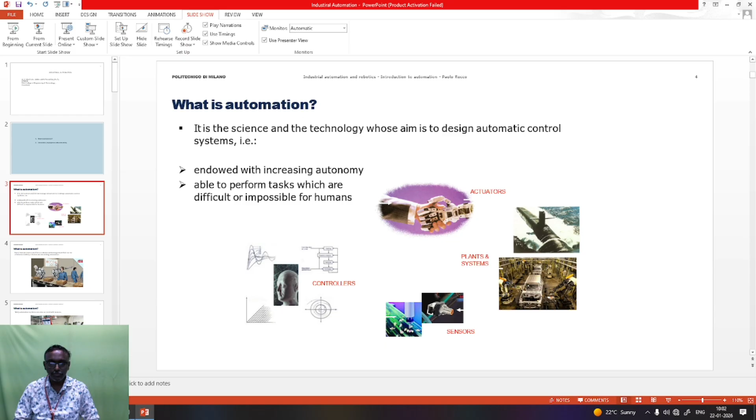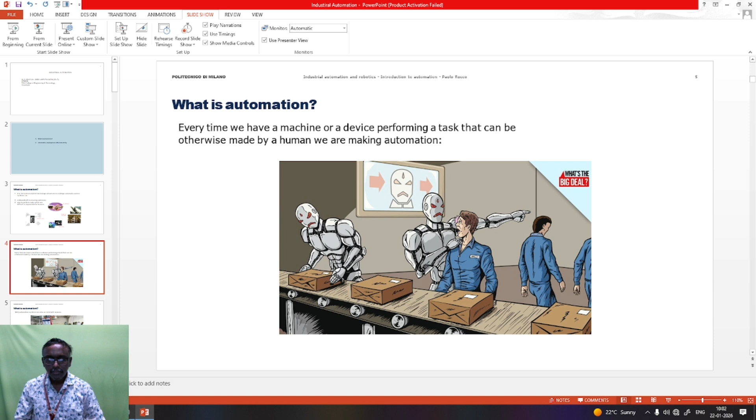What is automation? Every time we have a machine or device perform a task that could otherwise be done by a human, we call that automation. So in order for a machine to perform a task that a human would do, we automate it - that is called automation.

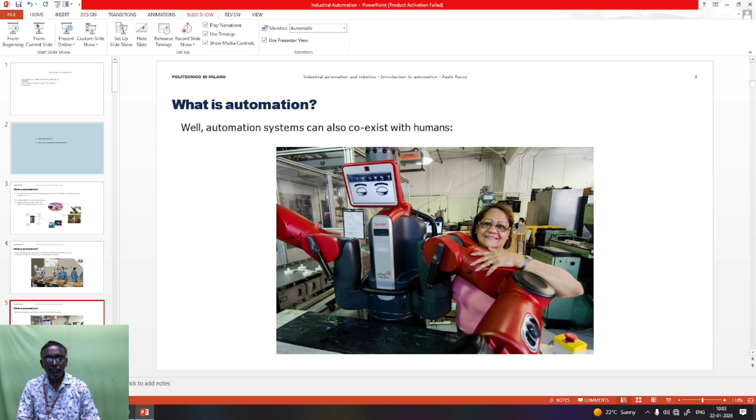Another point - an automation system can also coexist with humans. So human and machine can join together and perform a task, that is also called automation.

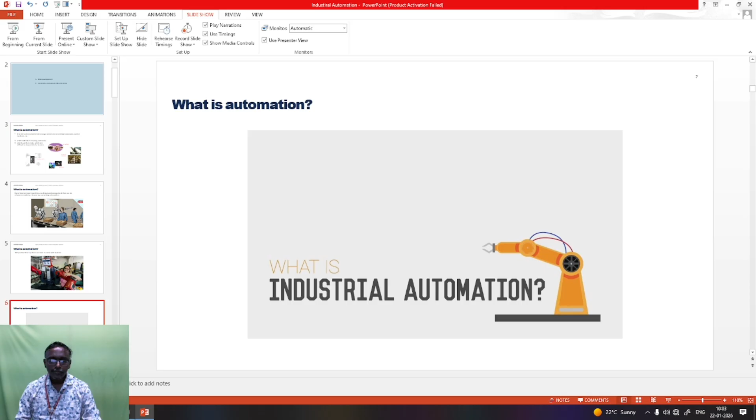So industrial automation - what is meant by industrial automation? In industrial automation, they are given a gripper that grips the tool, unloading and loading the products.

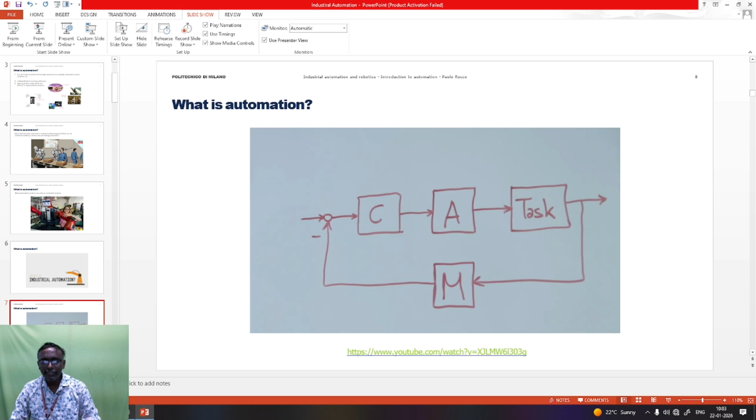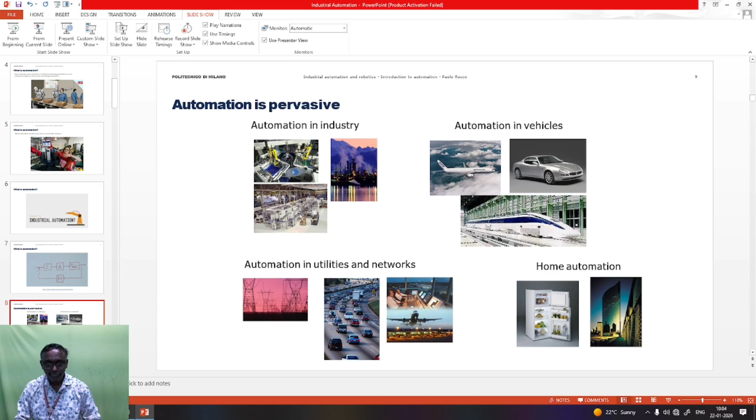Next is home automation - fridge and everything. Automation in utility and network - utilizing the network, so distribution lines and in airplanes. These are the networks. In an airplane we are connecting internet, meaning it utilizes a network - that is the automation thing.

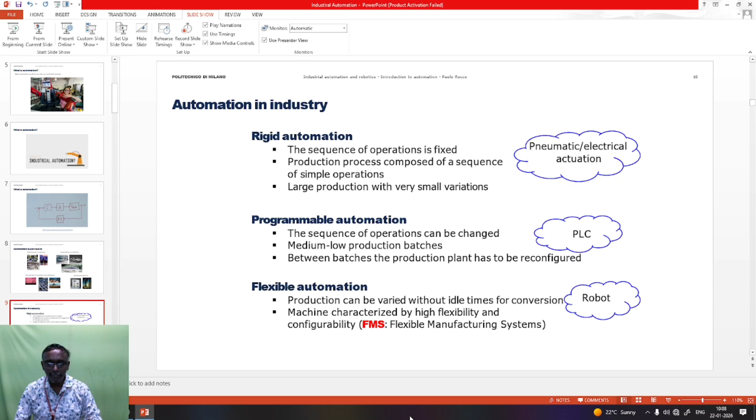So flexible manufacturing system means the robotic arm - for example, the robotic gripper can grip and unload the product from a ship, or load the product to the ship. These are some robotic components, robotic automations. Robotic automation is a vast topic.

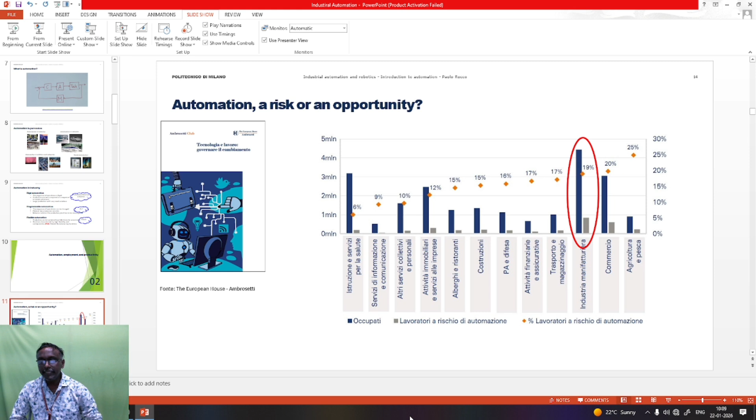So others like agriculture, construction, everything are having automation, but the big top is industrial manufacturing automation. So automation and productivity growth - the automation of activity can enable businesses to improve performance by reducing error, improving quality and speed. So when a machine has automation, it improves the quality and speed, in some cases beyond human capability.

Automation also contributed to productivity, as it has done historically. This would have given a needed boost to economic growth and prosperity, helping offset the impact of the declining share of working age population in many countries. So the productivity increase boosts the economy of every country.

So this is the relationship between automation and productivity growth. It is estimated - automation could raise the productivity growth globally by 0.8 to 1.4% annually.

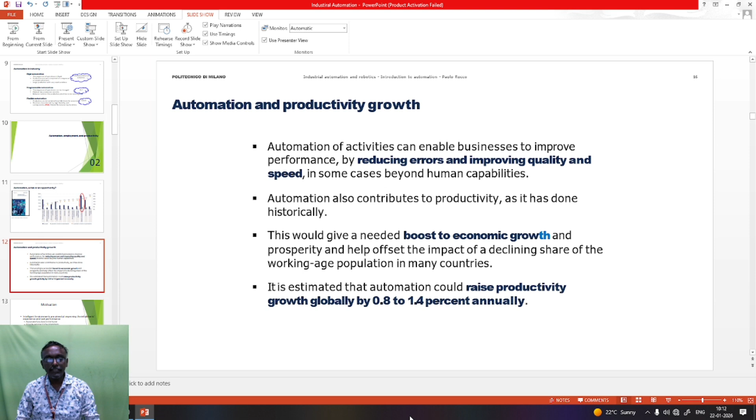So the environment affects things, meaning we have to control that. So performing intelligence automation, the system already gets help from the environment. So depending upon the environmental condition, we can make the decision.

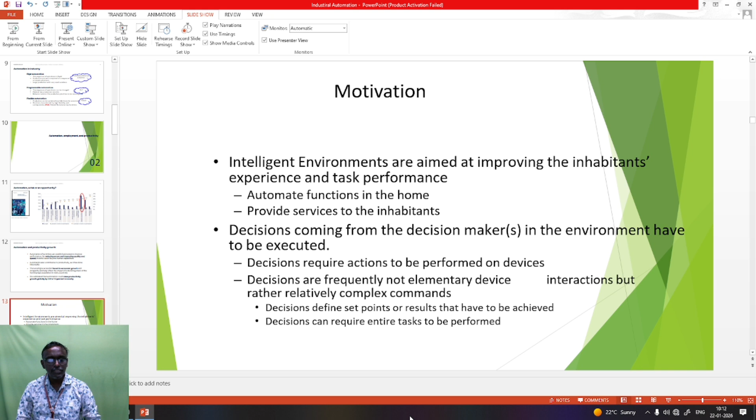Next one is motor drive robot. So how to drive a robot? Using a motor we can drive the robot, using a DC motor or AC motor.

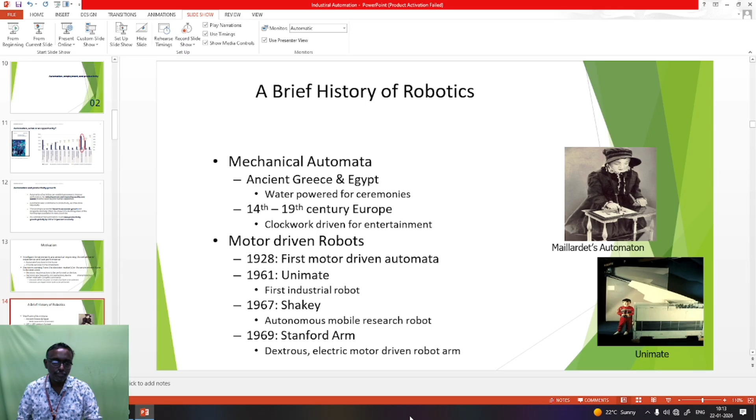Utilizing that, the automation also has mobile research robots - so first is the first industrial robot, an automation mobile robot. Next one is electrical motor, robotic arm. So in robotics there is a device with a degree of freedom that can be controlled - there are six degrees of freedom.

So first one is manual handling device - we can manually handle the device. Next one is fixed sequence robot, next is variable sequence robot. Fixed sequence robot means we can use it for a conditional one - we have to do the unloading and loading of a ship using a gripper robot, meaning that is fixed. So it is not a movable one.

So next one is variable sequence robot - meaning depending upon the environmental condition, it can change the robotic operation sequence. Next one is playback robot - meaning we already executed the program and stored it in memory, so it is repeated playback.

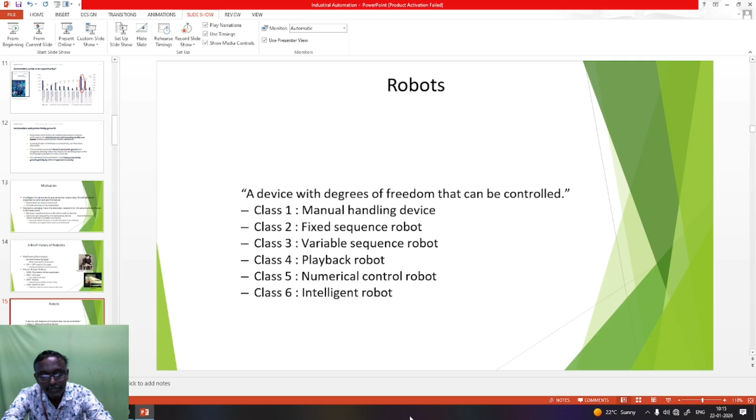So next one is numerical control robot - meaning nothing but numerical control, so numerically we can control it. Next one is intelligent robots. So first we are discussing about robots.

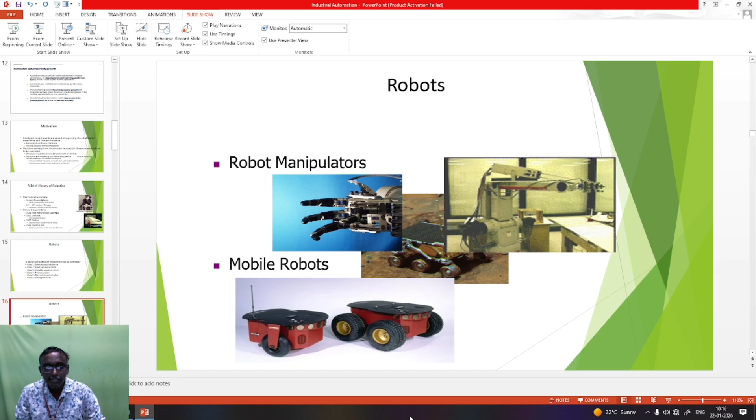So robots manipulator - this is a manipulator. It looks like the hands of a human, but is replaced with robotics. So next one is mobile robot - mobile robot means a platform, it is moving with the robotic.

Automation and robotics in intelligent environment - control of physical environment. Automated blinds. Next one is thermostat and heat - thermostat we already know. Depending upon the heat we can easily operate the machines, and depending on that it's called a thermostat. In the iron box itself they have a thermostat.

So in the fridge also they have a thermostat, depending upon the temperature. Next one is automatic doors - in automatic doors also we are employing robotic intelligence. Automatic room partition - automatic room partitions also have the robotic thing. So these are controlled by the physical environment, and depending upon it, we tune the robot.

So next one is personal service robot - home cleaning. Next one is assistance of elders and handicapped - assistance to elder and handicapped. So here floor cleaning also has a robot, and they are designing robots for home cleaning.

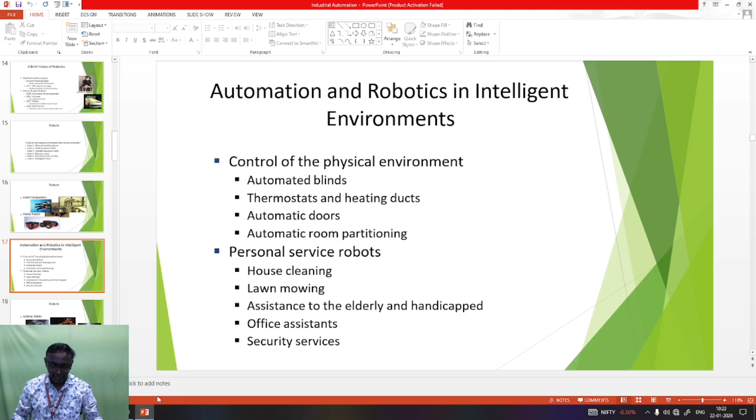Next one is security service - in security service we can replace humans with robotics. So these are some employments of automation and robotics in an intelligent environment.

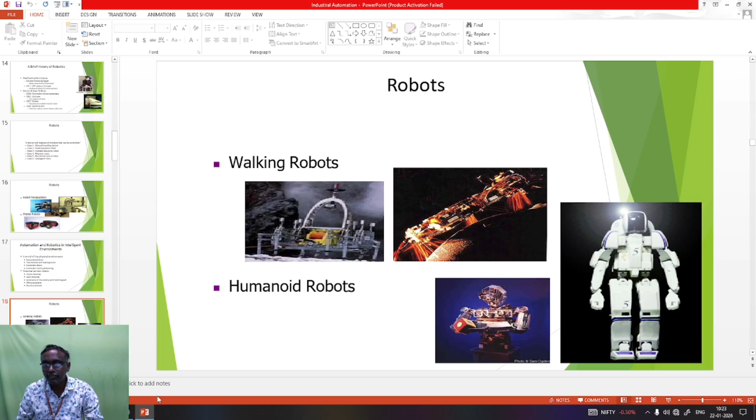It can walk on the moon and take videos, everything. So that is called. Next one is

Autonomous robots. The control of autonomous robots involves a number of subtasks: understanding and modeling of mechanism, and another one is kinematics, dynamics. So these are two properties.

Understanding and modeling. Next one is reliable control of actuator, that is closed loop. So closed loop means, as we already know, in control systems there is open loop and closed loop.

Next one is generation of task specific motion, path planning. So depending upon the task, the path is planned.

Next one is integration of sensors. So many sensors are employed in the industry, and they are added and accumulated in the microcontroller, and the output is an actuator.

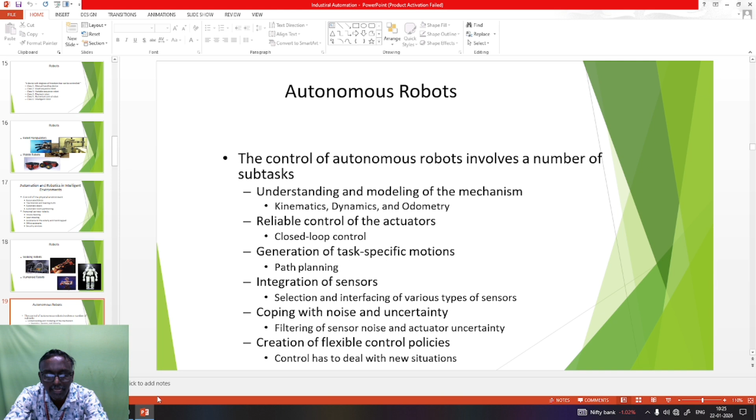Creation of flexible control policy. Control has to deal with new situations.

Requirement of robots in intelligent environment. Autonomously, robots must have the capability to achieve tasks and objectives without human input.

Without human input, the robot can operate, achieve the task and objectives.

Robots have to be able to make and execute their own decisions based on sensor information. So the robot can give decisions depending on the sensors, as the output of sensors or detectors is given to the robot.

Intuitive human robot interfaces. Using robots in smart homes cannot require extensive user training. Commands to robots should be natural for the inhabitants.

So this one is the human robotics interface. Human and robotics are interfaced; they are merged together and perform a task.

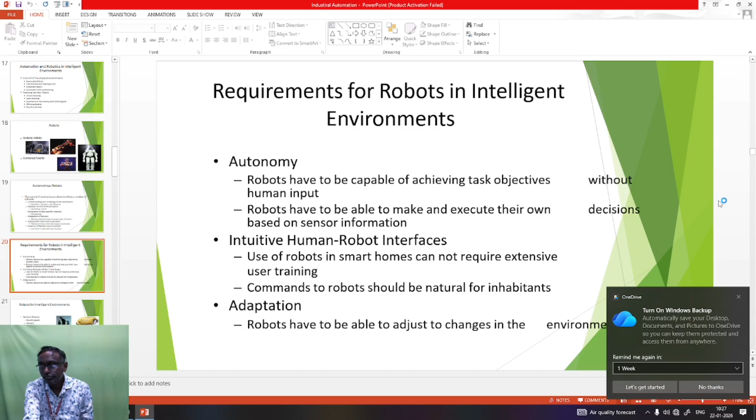Next one is robotics for intelligent environment. Service robot - so we are discussing service robots. It can act as a security guard.

Next one is delivery, another one is cleaning. So service robots include security guard, delivery, and cleaning. These are some applications of robots for intelligent environments. Depending upon the environment, the robot can change its state from one state to another.

Assistant robots - this is a mobility one. Next one is service for elder people and people with disability. So in mobile robotics, here a platform is shown, the yellow colored platform.

It does the floor cleaning work. It is on two wheels and it cleans the floor. It acts as a robot, a service robot.

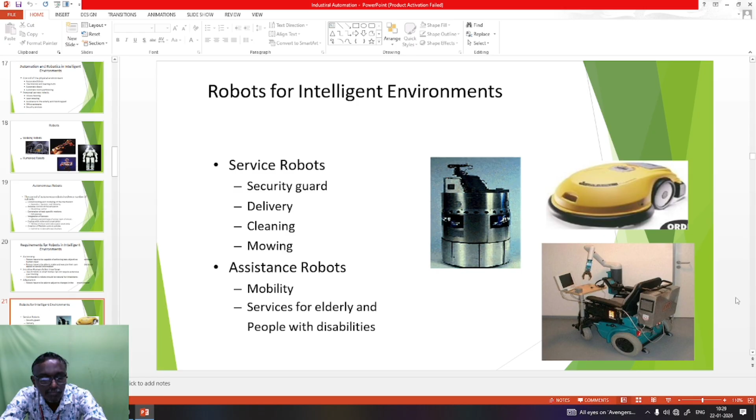We can easily let a person with a disability drive the assistant robot with their own idea. So provisions are given for assistant robots, for elder people and disabled people.

Automation robotic control - to control the robot to perform tasks autonomously, a number of tasks have to be addressed.

As we already discussed, modeling of robotic mechanism, kinematics and dynamics. Another one is robotic sensor selection - active and passive proximity sensors - low level control of actuator, that is closed loop control architecture. So control architectures exist: traditional planning architecture, and behavior-based control architecture.

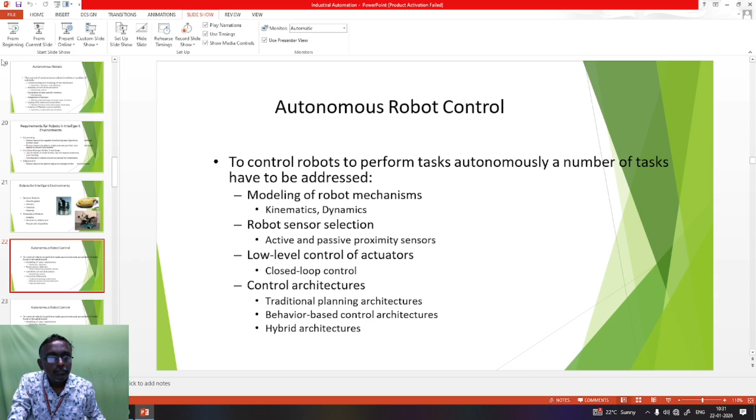Next one is modeling of mechanisms, robotic mechanisms. Forward kinematics describes how robot joint angle configurations translate to location in the world. So this is the modeling of robotic mechanism.

Next one is inverse kinematics - computation of joint angle configuration necessary to reach a particular point in space.

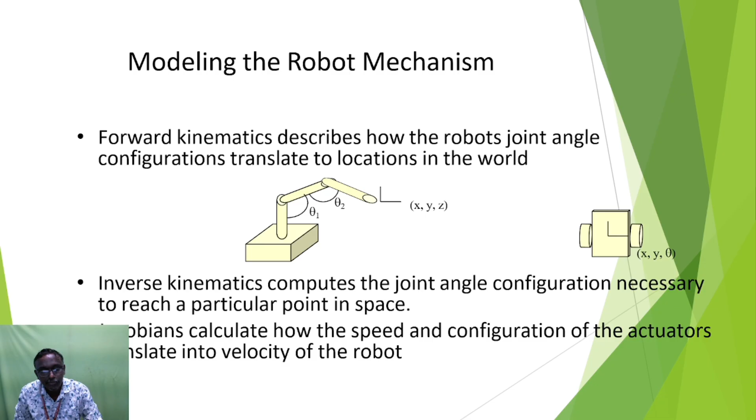So this is a three-dimensional one. Jacobians calculate how the speed and configuration of actuator is translated into velocity of robots.

So the next one is location. Location needs to be updated because it is a moving robot. So x and y, and on one side x, y plus vy - vy means nothing but velocity. X and y are the labels of horizontal and vertical.

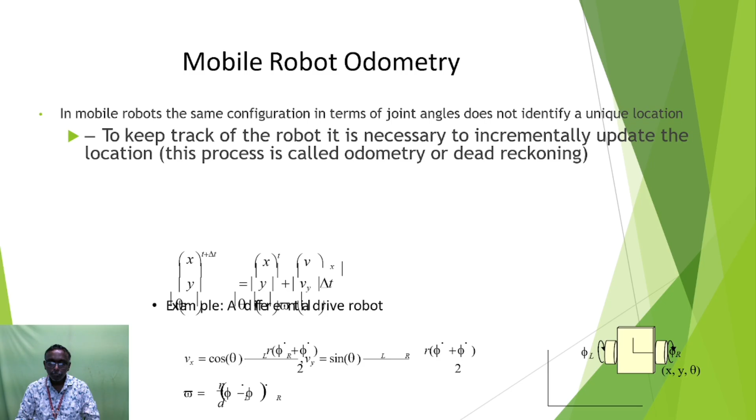Another concept purely depends upon the velocity of the moving robot. So robot navigation - path planning addresses the task of computation of a path for the robot such that it reaches the desired goal.

Without collision with obstacles. So when a moving robot moves from a far away distance, it reaches its goal without collision with obstacles. There are so many sensors connected, and any obstacle that comes between interferes, so it should be changed with path planning, and it does not collide with others, and it reaches its destination.

An optimized path is hard to compute, particularly for robots that cannot move in arbitrary directions. A short distance path can be dangerous due to obstacles. So though there are so many obstacles when a robotic car is moving on the road, we have to employ so many sensors and do path planning for every update.

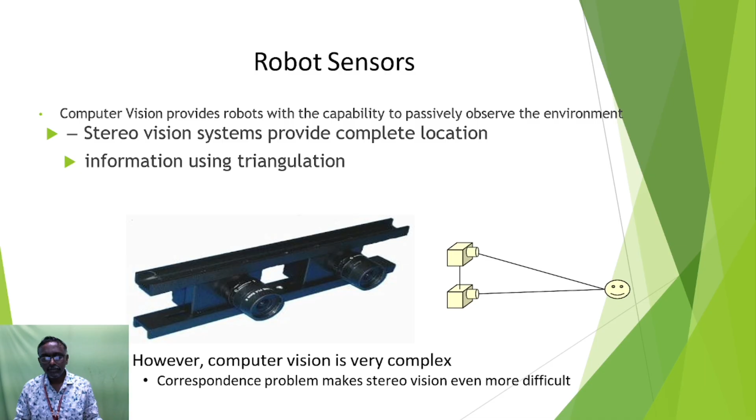Next is deliberative robotic control architecture. In a deliberative control architecture, the robot first plans a solution for the task by reasoning about the outcome of that action and executes it. They are given the programming and that is executed.

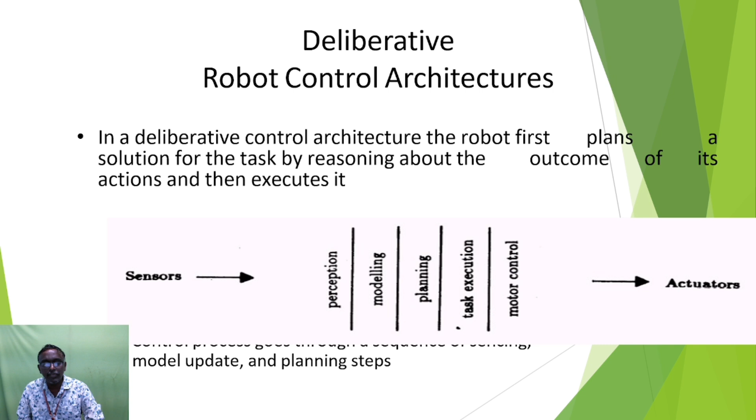This is the task of reasoning - sensors are employed on the left hand side, actuator on the right hand side. Sensors sense the physical parameter: perception, modeling, planning, task execution, motor control, which is given to the actuator. So these are some deliberative robotic control architectures that we can plan.

Next is behavior based robotic control architecture. In this architecture, the robot's actions are determined by a set of parallel reactive behaviors which map sensory input to the appropriate action.

On the left side is the sensor, and there are reasonings about behavior of objects, planning change of the world, identifying objects, monitoring change, building a map. Depending on this, these things are set in parallel and execute the output, which is actuation.

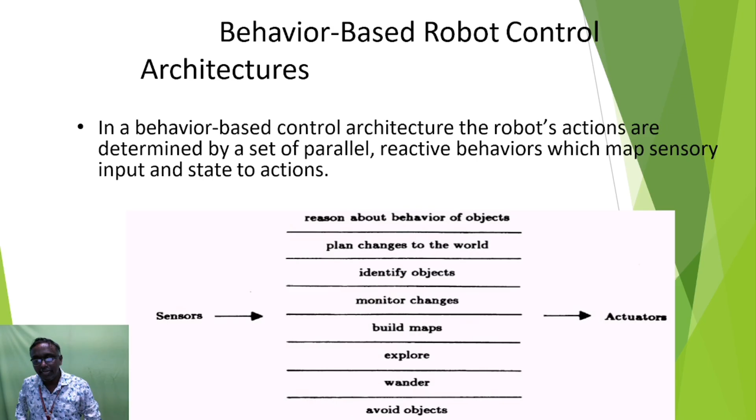So objectives: next we are going to discuss mechatronic systems. Understanding key elements of a mechatronic system, representing it with a block diagram, and understanding the concept of transfer function.

What is transfer function? We already know in control systems it means output by input, and reducing and analyzing. Reducing means signal flow graph - there are so many things, and analyzing, another one is feedback.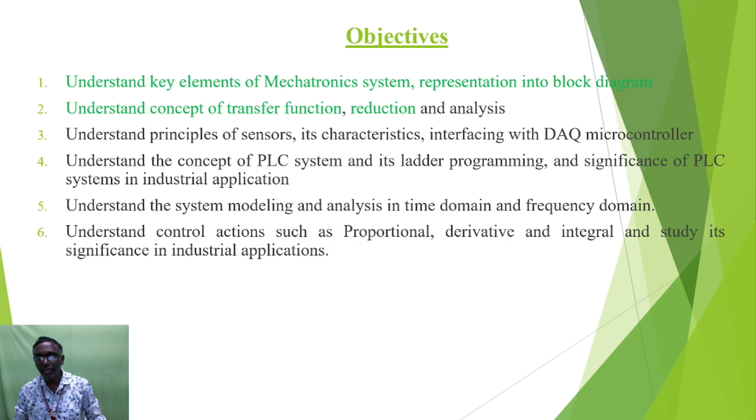The third point is understanding the principle of sensors and its characteristics. The fourth point is PLC systems and its ladder programming. Another point is understanding system modeling and analyzing time domain and frequency domain. The sixth point is control action of proportional, derivative, and integrative study, and its implementation in industrial applications.

So the outcomes: identify the key elements of mechatronic systems. We are going to discuss what is a mechatronic system, and understanding the concept of signal processing and use of interfacing systems such as ADC,

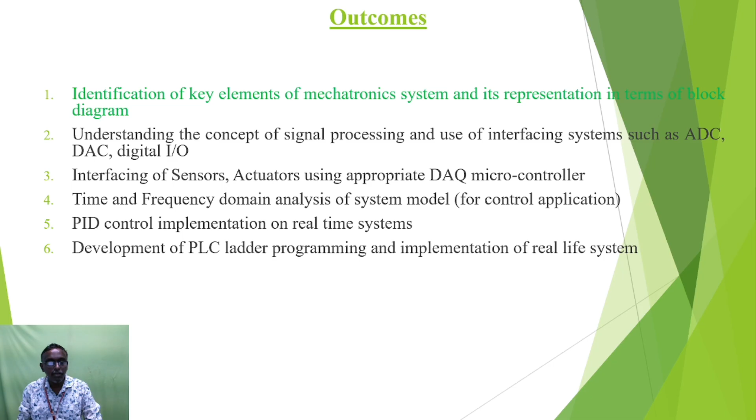DAC, digital I/O, and interfacing of sensors and actuators using DAQ microcontroller, time and frequency domain analysis of modeling, controlling application, and PID control. PID control, we already know - proportional, integrative, differentiative control implementation for real-time systems. Next is development of PLC ladder programming and implementing it for real-time systems.

Engineering mechanics, dynamics - engineering mechanics is the keyword. Next is engineering maths 1, 2, 3. Next is open loop and closed loop control system. This is the basis of mechatronics.

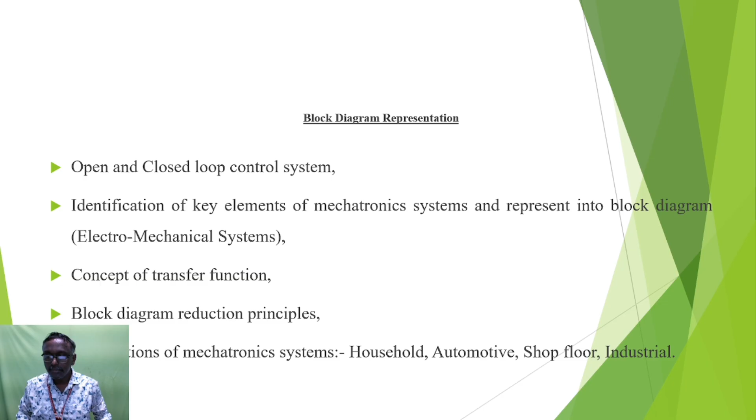Automation - identifying key elements of mechatronic systems and representing the block diagram, the concept of transfer function, block reduction principles, and applications of mechatronics in household, automotive, and shop floor industry.

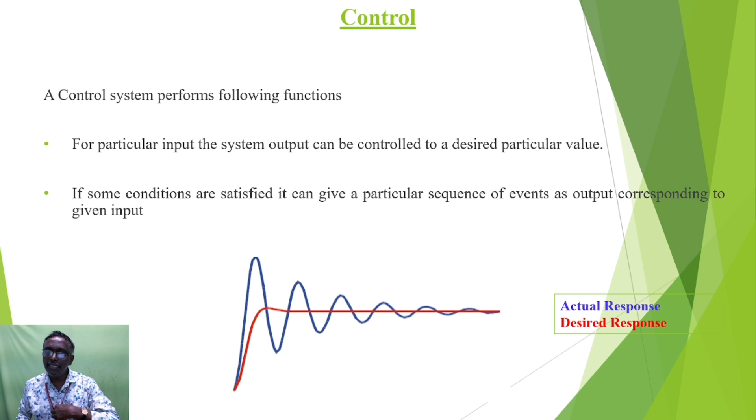So the control system performs the following functions: for a particular input to the system, the output can be controlled to a desired particular value. If some conditions are satisfied, it can produce a particular sequence of events as output corresponding to the input.

So next is open loop control system. In an open loop control system, the output depends on the input, but the control action is totally independent of the changes in output - in an open loop control system, no feedback is used.

No feedback is used, so the controller must independently determine what signal to send to the actuator. So this is an input controller.

Next one is plant output. Here the basic control system applications are applied to a power plant. So many power plants are there: thermal power plant, water power plant, meaning hydraulic power plant.

In Neyveli, using coal, we can produce electricity. Coal is converted into electricity power. So these are some things related.

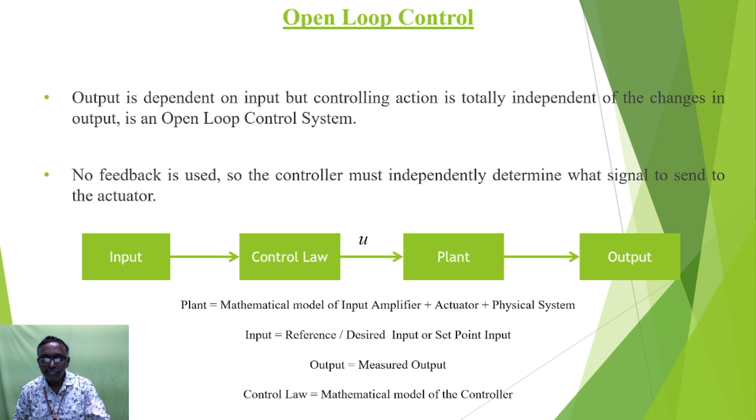Next one is solar system. The solar panel converts solar energy, that is light, into electricity. So these are the plants.

For example, this is an example of an open loop system. The water is flowing through the tube, but we can control it with the hand valve. So this is an open loop control system.

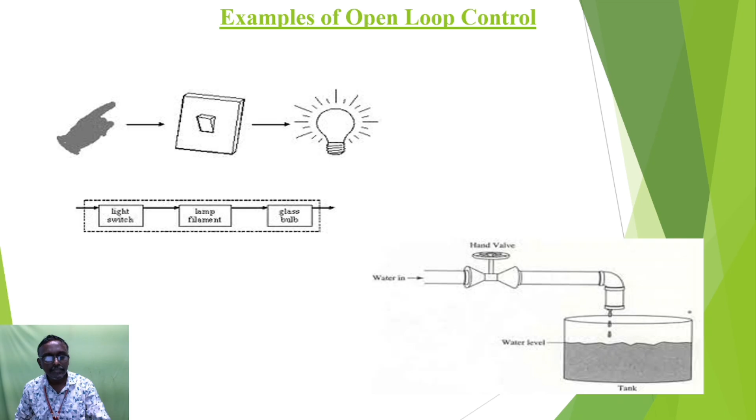So the real-time applications are plant systems: hydraulic plant, thermal power plant, everything, water power plant, next one solar power plant. We can produce electricity using this, store it, and distribute it like in the corporation electricity board. We can utilize that.

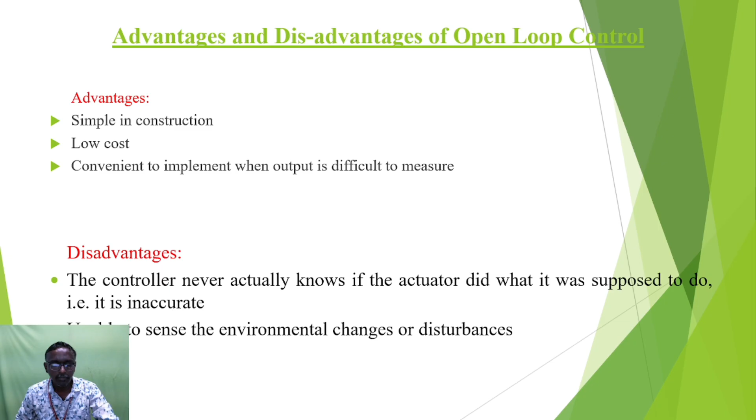Advantages are simple in construction, lower in cost for open loop. But in open loop there are so many disadvantages, though environmental changes can affect the system.

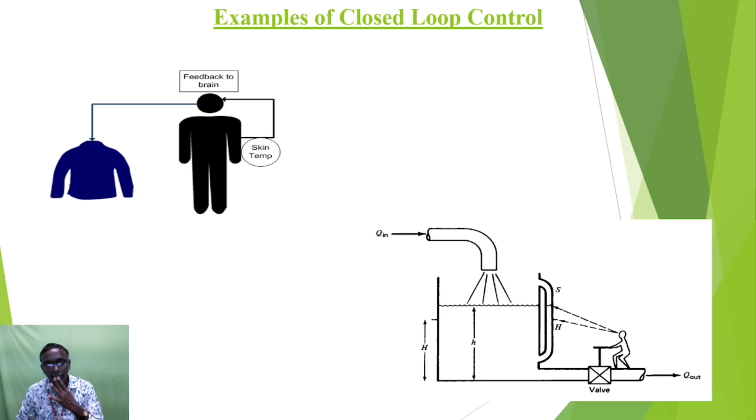In a closed loop system, there is some gain. This is a closed loop system. When we are pouring, we are given a motor and it is pumped up to the tank. Tank is filled.

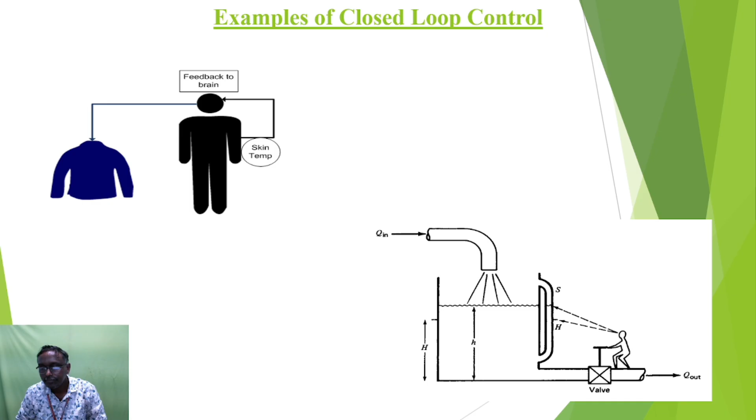And that is given to the valve for outlet. So it is a closed loop control system. The valve controls the whole water output. So this is a decided one. We can easily control the environment.

Next one is key elements in mechatronics. So mechatronics involves a mechanical system, the system model, and dynamic response. The system consists of actuator and sensor. These are the mechanical system.

Actuators are a DC motor, stepper motor, servo motor, hydraulic, pneumatics. These are the actuators. Sensors are divided into digital sensors and analog sensors. Here a strain gauge, thermocouple, accelerometer, MEMS, these are some sensors, digital and analog.

Another one is input signal conditioner and interface, meaning the analog signal is converted into digital signal and given to the digital control architecture. In digital control architecture, the logical circuit, microcontroller, SBC, PLC are provided. So it controls the automation.

The output is dealt with by output signal conditioner and interface. We are converting the output using power transistor, power op-amp. These are the output sections, and display sections are graphical displays, such as LCD and LED. So these are two things.

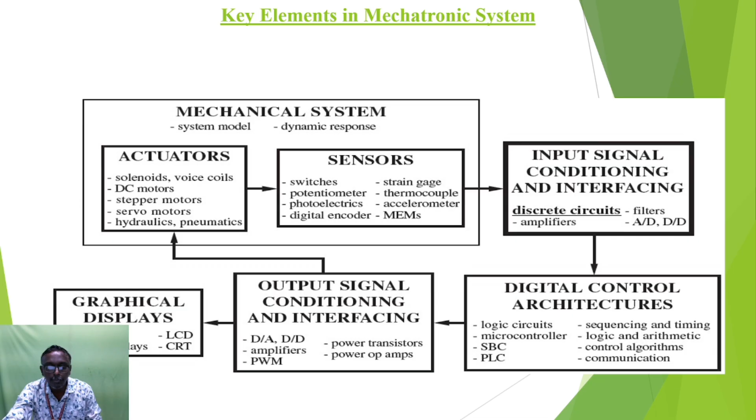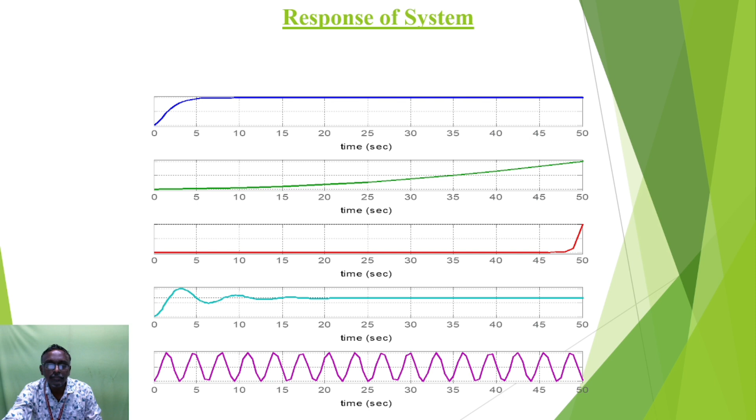Another one is CRT, another one is DSO. These are the graphical displays of the output. This is a small mechatronic system, showing input and output response.

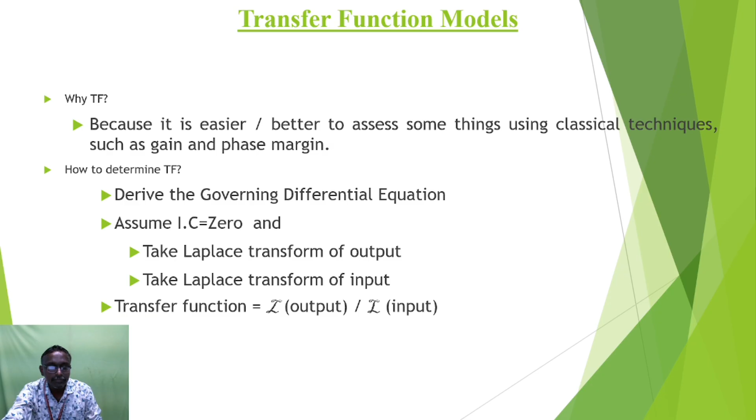Next one is transfer function. Transfer function means output by input, nothing but transfer function. In this transfer function they are dealing with Laplace transform.

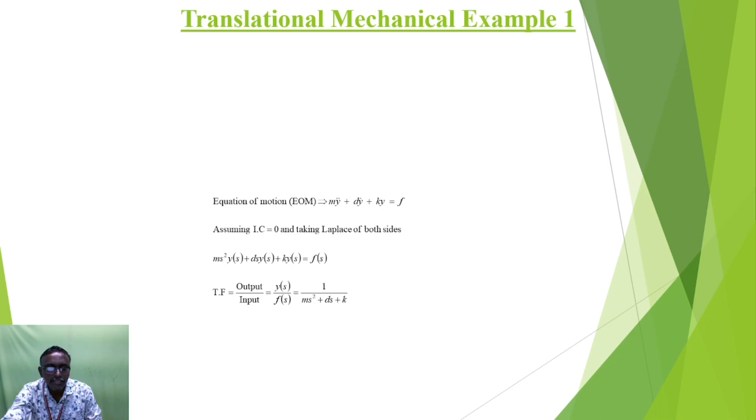Translational mechanical example: we already know that in control system itself we are having three parts, one is dashpot, spring, okay, so these are three parts. So all three parts are available here, and we are analyzing the system.

Here M is the mass, next one is spring, damper. These we already studied in the control system itself, so in the control system, these are given.

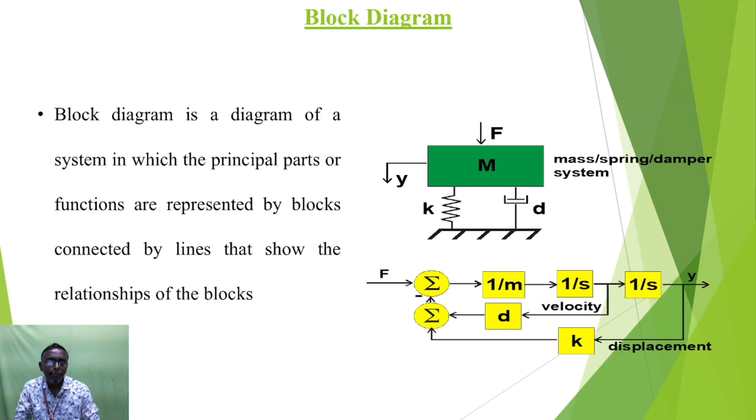This is a simple block diagram of the system. Principal parts or functions are represented by blocks, and lines show the relationship between blocks. Okay, M, K, D, we already discussed this in the control system itself.

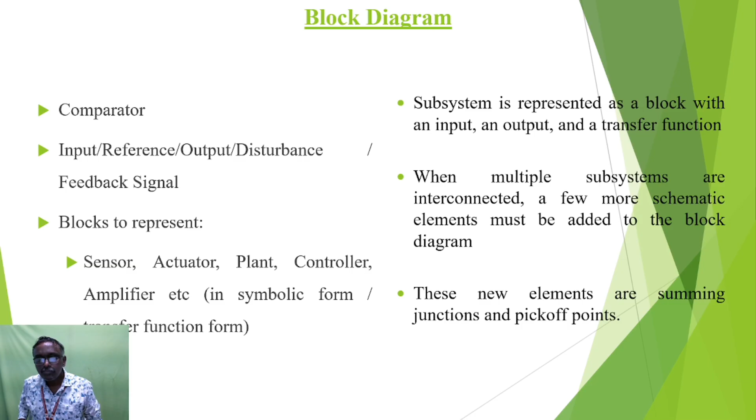So here we are discussing control system feedback. Feedback means nothing but the output is fed back to the input. A power plant system is there, the output is fed back to the input, that is called feedback. There are two types of feedback: negative feedback and positive feedback.

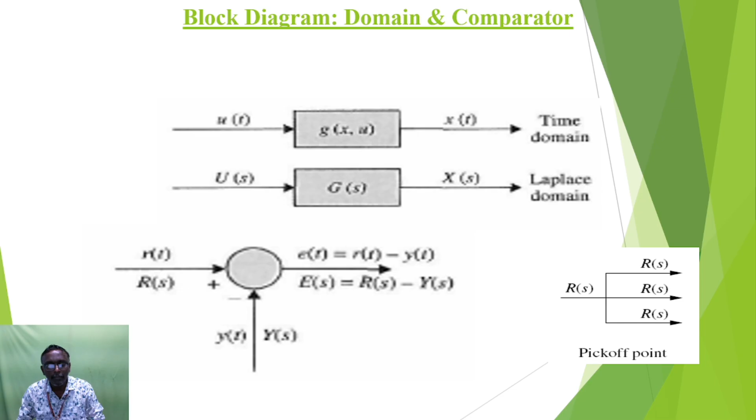Depending upon that, next is summation and subtraction, that is a comparator. Comparator means nothing but comparing two values. 1 and 2 are compared, meaning 2 is greater than 1. So we can fix A and B, so A is less than B. In this manner we can manipulate.

Another one is serial block. Serial and parallel block means, we already know that resistance can be serially connected and parallel connected. In the same manner we can connect G1 of S and G2 of S in serial manner and parallel manner.

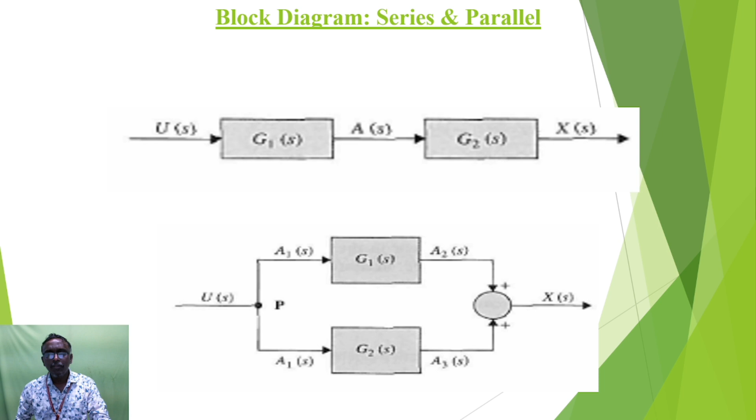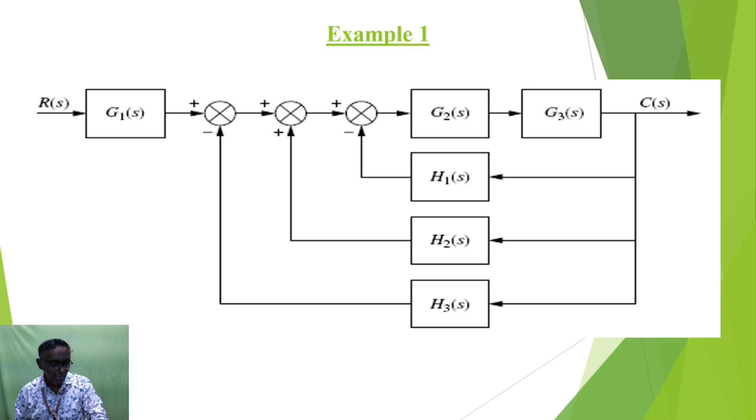We have to reduce the block representation as in control system. So this is the block. This is a negative feedback. This is negative feedback, this is positive feedback. So three feedbacks are connected in a single junction.

So next we are given one is plus, one is minus, another one is positive feedback to be negative feedback, to be positive. So we are having H1 of S, H2 of S, H3 of S. So this is a block. Next these two are in series, G2 of S into G3 of S.

Next these two are in feedback circuit. So feedback circuit, what is the thing? This is a negative feedback circuit. So negative feedback means G divided by 1 plus GH. So this is the formula. On that formula we are reducing this one.

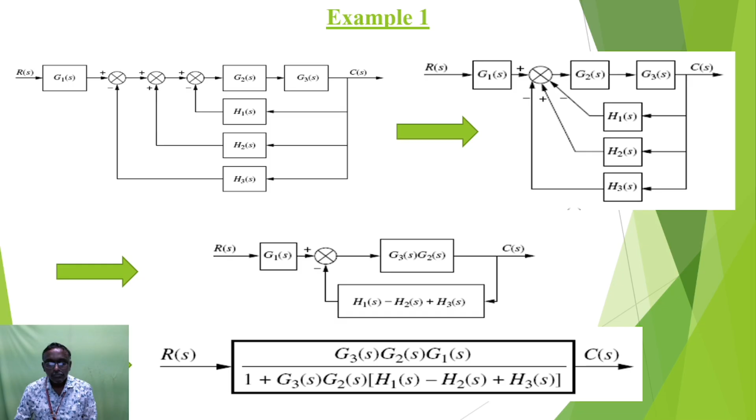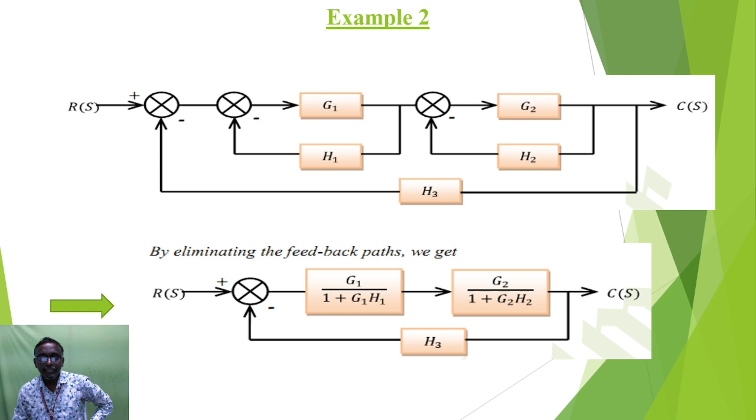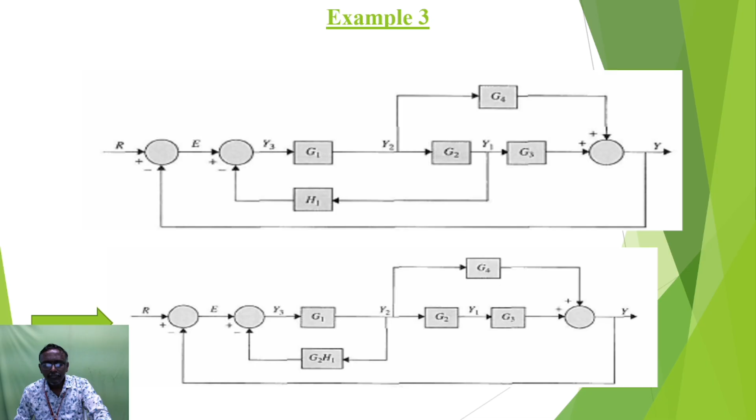By eliminating the feedback path we can get, and we are getting this one. In this manner we are reducing the given block diagram. So that example, this is also the same thing in the flow diagram. This is a block diagram. We have to reduce using negative feedback, positive feedback, serial and parallel. So these are the things, these are the examples. 5 examples are there given.

So next one is applications of mechatronics. Mechatronics has so many applications: household devices, refrigerator, washing machine, microwave oven, automotive. Automotive means fuel injection system, power steering, air conditioner, shop floor, tool monitoring, automation, guiding vehicle, conveyor system, bottle filling plant. So these are some applications.

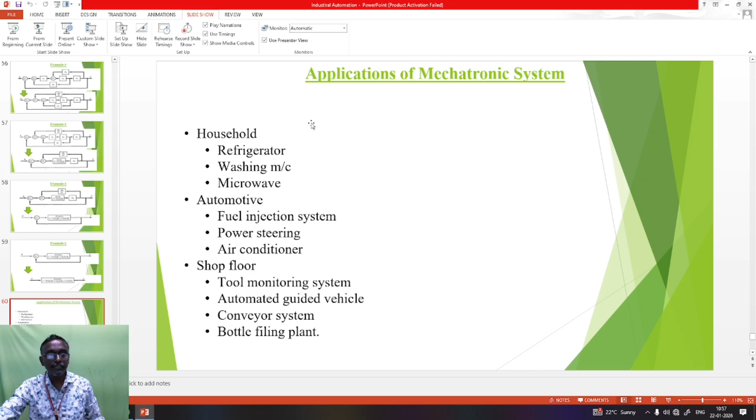The power steering means nothing but in the car, when you are starting the car, we have to start with power steering. Afterwards they will disconnect the power steering because we slightly turn the steering, it can turn for power steering. Otherwise, it can be in normal position. After 40 kilometers, it is in normal steering in modern cars.

Air conditioner. So air conditioner is an automation also. We can automate the air conditioner due to environmental changes. So due to the climate, we can change the air conditioner range, cooling range, everything.

Next one is shop floor, tool monitoring system, automated guided vehicles. We can automatically guide a vehicle. Next one is conveyor belt. In the conveyor belt, they transport coal, everything. In the conveyor belt, we can assemble the cars, unassembled cars.

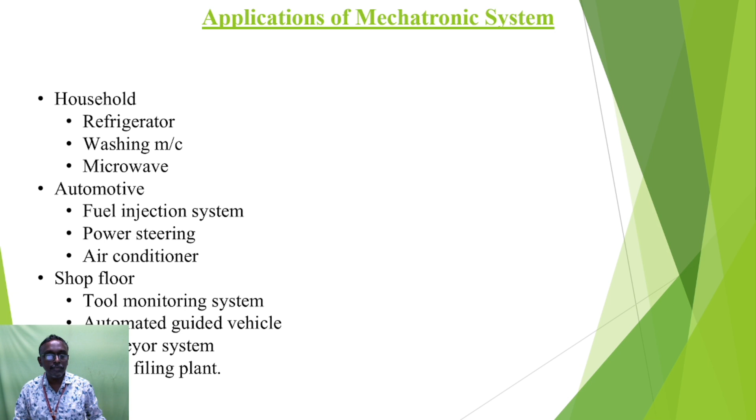In the conveyor belt, we can assemble the cars in sequence. Bottle filling plant means nothing but Fanta, Coca-Cola, Pepsi. So these are the bottle filling plants they employ. So for that one also, the mechatronic automation is implemented.

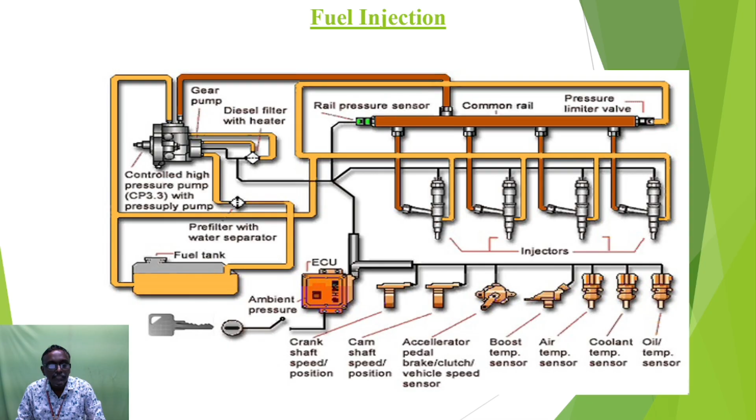So this is the fuel injection. In this fuel injection, this is 4-stroke, because four types of valves inject the fuel. So this is 4-stroke petrol, 4-stroke diesel engine, depending upon that.